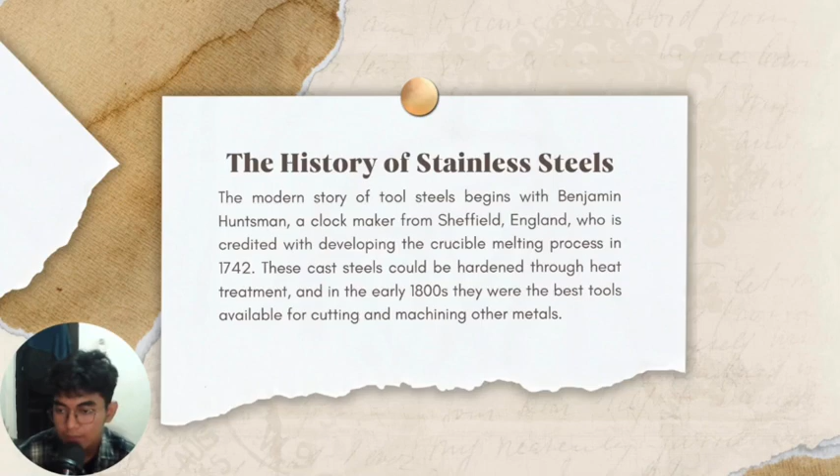Haynes applied for the patent of a martensitic stainless steel alloy, while the engineer named Benno Strauss and his friend Eduard Maurer in Germany successfully patented an austenitic stainless steel. In the same era in the United States, Christian Dantsizen and Frederick Becket developed a ferritic stainless steel alloy. Okay, go next.

Modern alloys. Many new stainless steel compositions have been invented and commercialized over the years since the initial discovery of those alloys. One of the reasons for the popularity of stainless steels, in addition to their corrosion-resistant properties, is their versatility in processing and application.

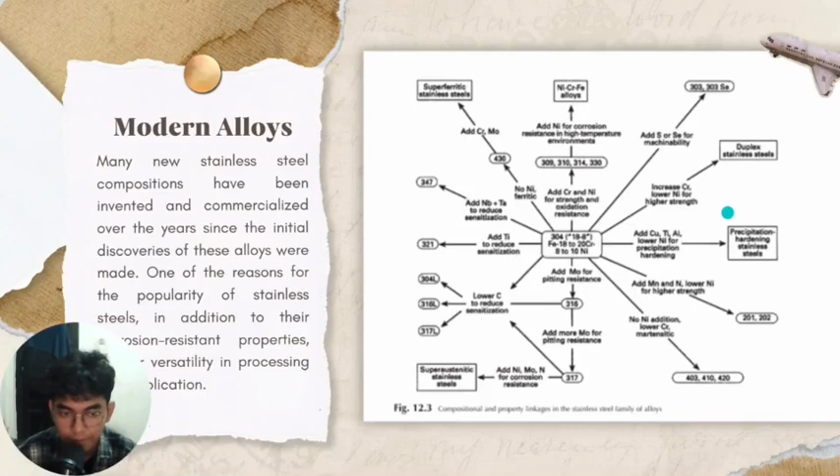Okay, here's the picture about the austenitic 304 stainless steel grade. It contains the basic chemistry. You can pause the video and take a screenshot if you want. Okay, we go next.

Okay, the next is austenitic stainless steel. Austenitic stainless steel alloys are among the most common grades of stainless steel. They are classified with the AISI 200 or the 300 series. In this designation, the 300 series grades are chromium-nickel alloys, and the 200 series represents compositions in which manganese and nitrogen replace some of the nickel. Okay, we go next.

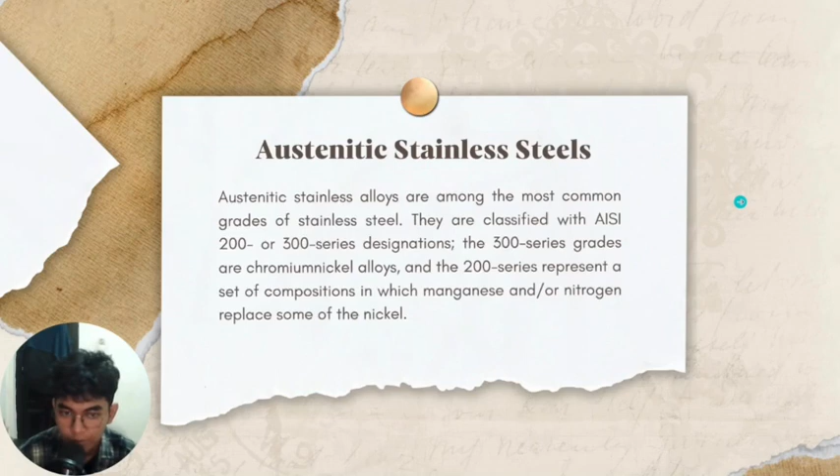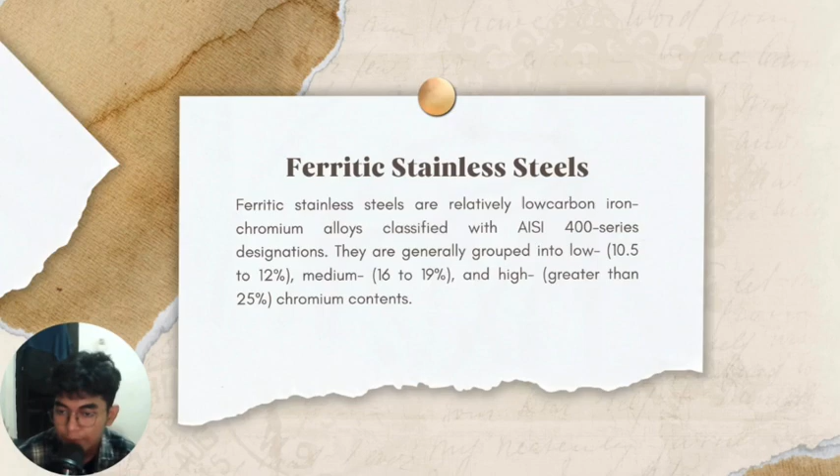Ferritic stainless steel. Ferritic stainless steels are relatively low-carbon iron-chromium alloys classified with the AISI 400 series designation. They are generally grouped into low, medium, and high. Low is between 10.5 and 12%, medium is between 16 and 19%, and high is greater than 25%. They are generally not alloyed with either nickel or nitrogen. The ferritic stainless steels have relatively poor high-temperature properties. Okay, we go next.

The next is duplex stainless steel. Duplex stainless steel alloys consist of two phases at room temperature, austenite and ferrite. Duplex stainless steels can generally be regarded as chromium-molybdenum ferritic stainless steels with sufficient nickel, or an austenite stabilizer, to create a balance of ferrite and austenite at room temperature. This alloy possesses the characteristics of both ferritic and austenitic grades.

Their corrosion resistance is similar to their austenitic counterparts, but their stress corrosion resistance, tensile strength and yield strength are generally superior to that of the austenitic grades. Okay, this picture right here is an example of a wrought 2205 duplex stainless steel microstructure. Ferrite dark, austenite light. We go to the next slide.

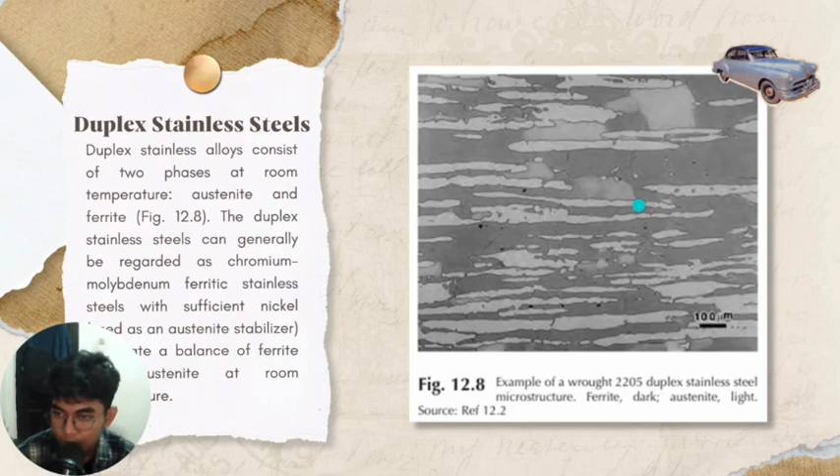The next slide is the martensitic stainless steel. Martensitic stainless steel alloys are Fe-Cr-C alloys that are ferromagnetic, and unlike the other grades of stainless steel, they can be hardened through heat treatment in the same manner as non-stainless carbon and low-alloy steels. In general, martensitic stainless steels can have very high hardenability depending on the carbon content of the individual grade.

These stainless steels are used in applications requiring good tensile strength, creep, and fatigue properties, in combination with moderate corrosion resistance, good wear resistance, and heat resistance up to approximately 650 degrees Celsius.

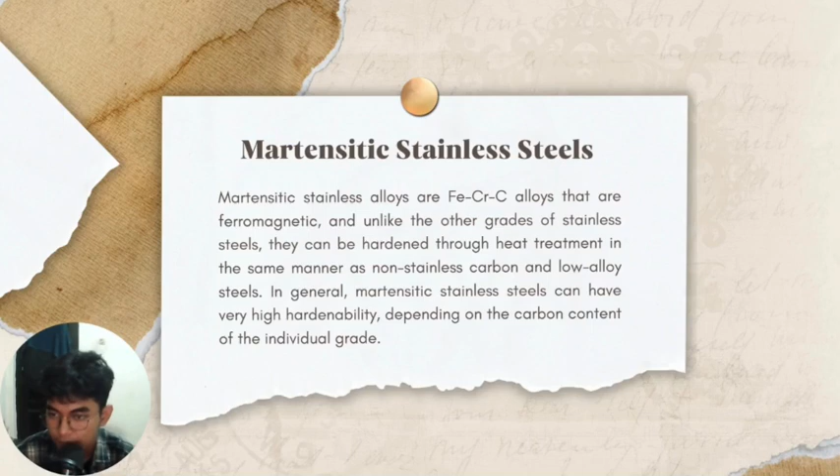Okay, we go to the next slide. The heat treatment of martensitic stainless steel. Because the thermal conductivity of stainless steel is characteristically lower than that of carbon and alloy steel, high thermal gradients can induce thermal stress during rapid heating or quenching, which may result in distortion, warping, or cracking in some components. In order to minimize this type of problem, preheating is normally recommended.

Okay, preheating. Parts that should be preheated prior to the annealing or hardening operation include parts of heavy or thick section, parts containing several geometric changes, parts with both thick and thin sections, parts with sharp corners and re-entrant angles, heavily ground parts, machined parts with heavy deep cuts, cold formed or straightened parts, and the last one is previously hardened parts that are subject to reheat treatment.

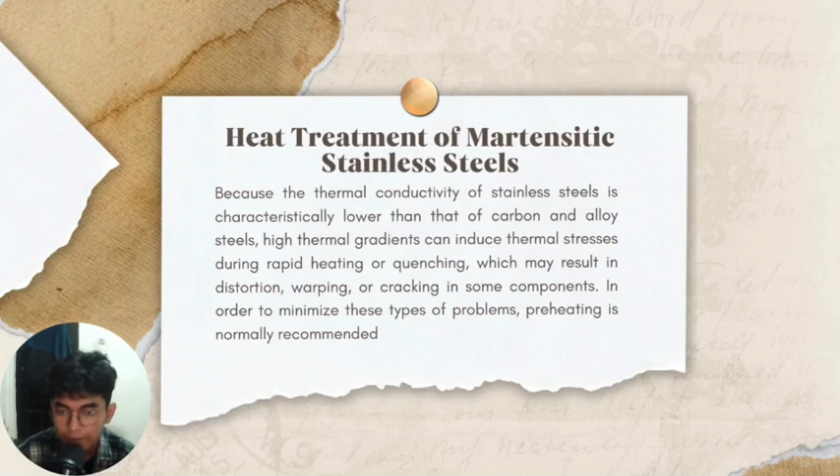Normal preheating temperature for the martensitic stainless steel alloys is in the range of 760 to 790 degrees Celsius, and heating is continued until all portions of each part have reached the aim temperature.

Okay, we go to the next slide. The precipitation hardening stainless steel. Wrought precipitation hardening or PH stainless steel alloys are designated in the AISI 600 series and also by nonstandard proprietary compositions. However, the UNS designations and the proprietary names of these alloys are often used with greater frequency than the AISI designations. There are two types of PH or precipitation hardening stainless steel.

The first one is semi-austenitic and number two is martensitic. Okay, I will explain about the semi-austenitic PH stainless steel. Semi-austenitic PH stainless steels are essentially austenitic in the solution annealed condition. After the fabrication operations are complete, they can be transformed into the martensitic structure through an austenite conditioning heat treatment that converts the austenite to martensite.

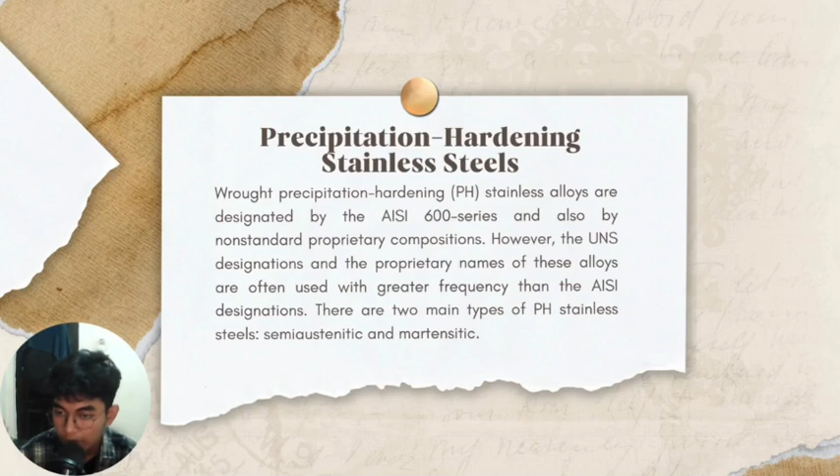Number two is the martensitic PH stainless steel. Martensitic PH stainless steels are the more popular commercial grades because of their relatively high hardness in the solution annealed condition. The martensitic grades are used principally in the form of plate, bar, rod, wire, and heavy forgings. Okay, we go next slide.

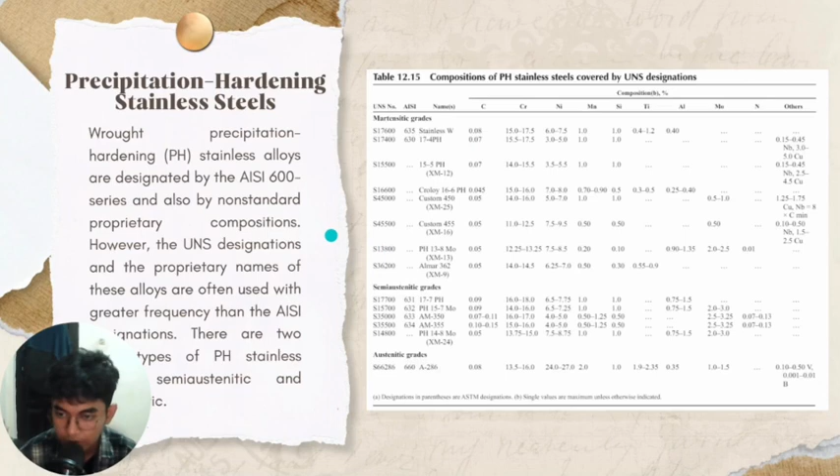650 degrees Celsius or 1200 degrees Fahrenheit, or heat-resistant castings, which are suitable for service temperatures above 650 degrees Celsius or 1200 degrees Fahrenheit. Okay, we go next slide.

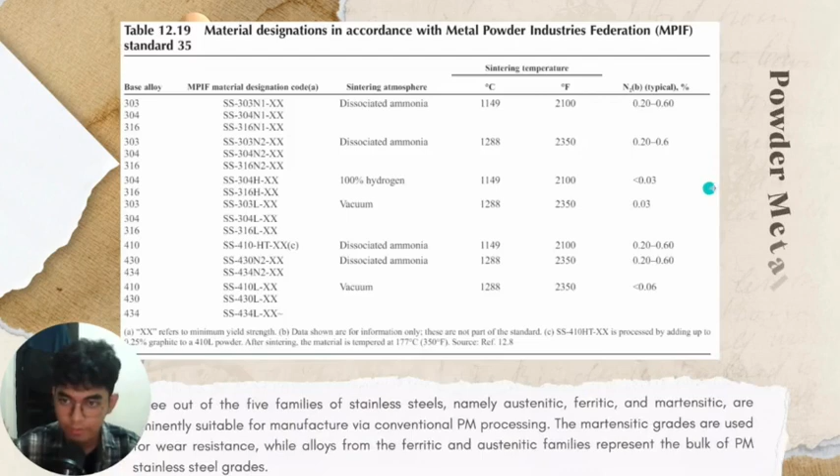Okay, powder metallurgy stainless steel. Three of the families of stainless steel, namely austenitic, ferritic, and martensitic, are eminently suitable for manufacture via conventional PM, or conventional powder metallurgy, processing. The martensitic grades are used for wear resistance, while alloys from the ferritic and austenitic families represent the bulk of PM stainless steel grades.

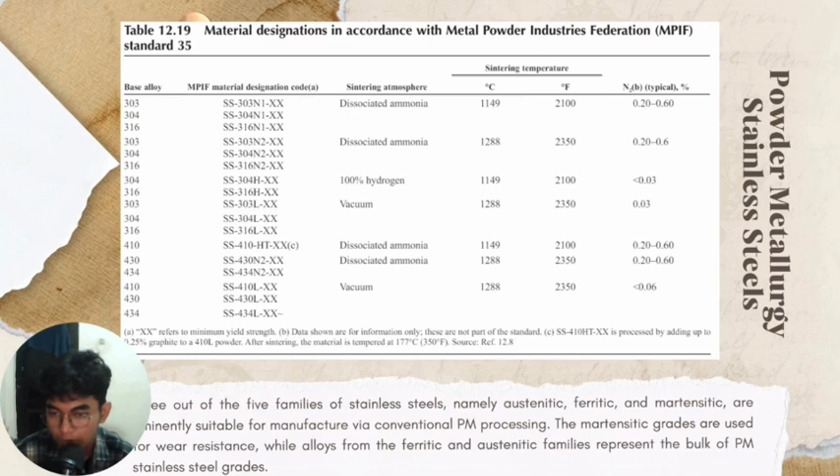Okay. This picture is the standard PM stainless steel designations. In addition to the standard PM stainless steel grades, a number of nonstandard grades or custom and proprietary alloys are in widespread use in the PM industry. Okay, we go to next slide. Okay, this is the last slide.